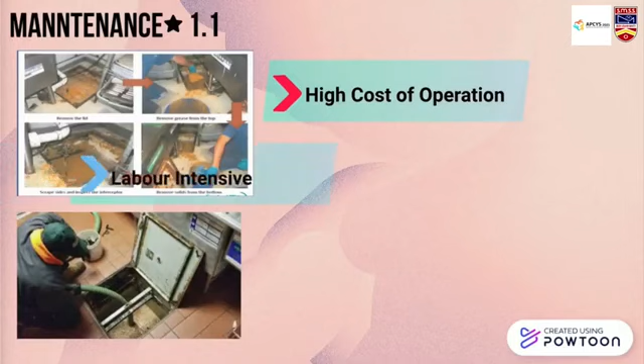The maintenance of a standard grease trap requires a high cost of operation, is labor intensive, and is harmful for the workers.

First, water from the kitchen grease trap will flow out through an inlet pipe. Second, grease that is less dense than water will float above the water, while food solid that is more dense than water will sink. Third, wastewater will flow out through the crossover pipe into the secondary tank. And lastly, the wastewater will flow out through the outlet pipe to the sewage pipe.

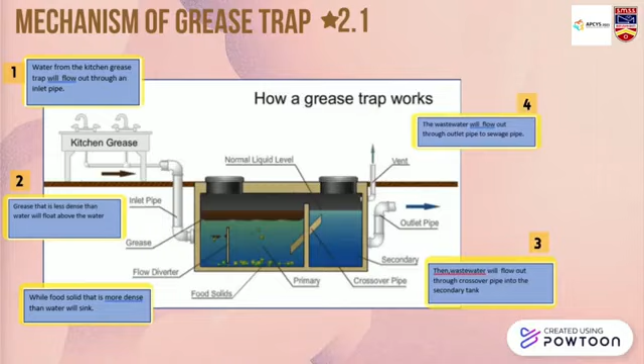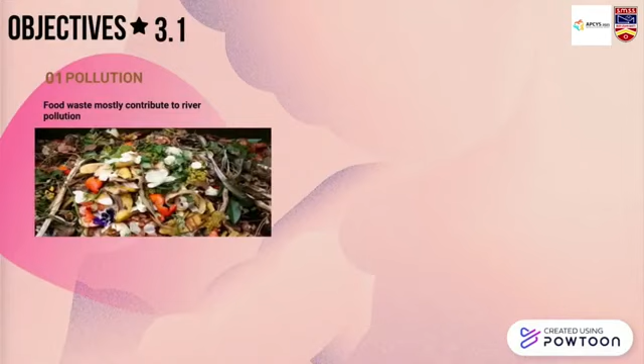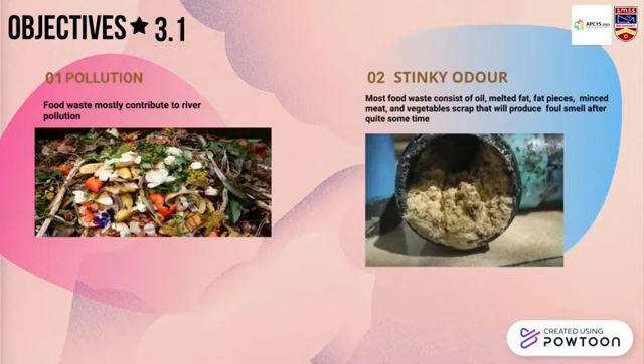Now we move to the problem statement. First, pollution: food waste mostly contributes to river pollution. Second, stinky odor: most food waste consists of oil, melted fat, fat pieces, minced meat, and vegetable scrap that will produce foul smell after quite some time. Third, high cost: the cost needed to repair and maintain the clogged pipes due to solidification.

Our goal is to design a smart maintenance system based on the Internet of Things (IoT) to do the maintenance service for the kitchen grease trap.

The novelty of our product is first, cost efficient; second, innovative design; and third, the application of Internet of Things.

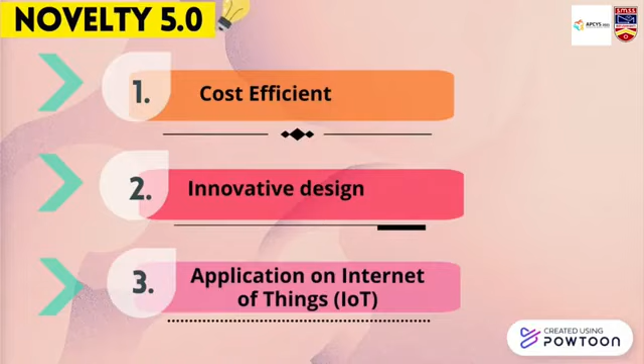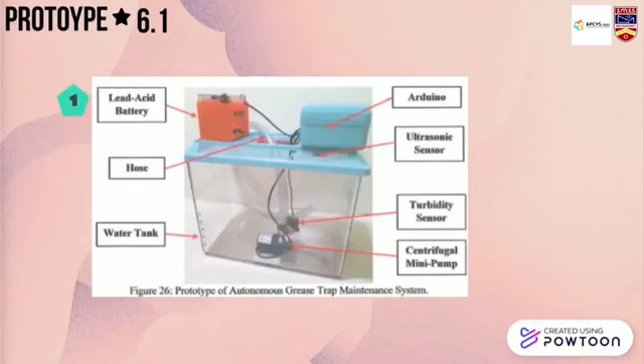For the prototype, there are 7 components that we use: lead acid battery, hose, water tank, Arduino, ultrasonic sensor, turbidity sensor, and centrifugal mini pump.

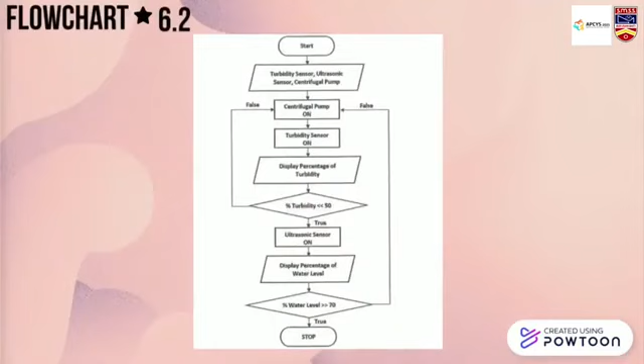From the chart below, we can see how our autonomous grease trap based on the Internet of Things works when it is operated using an Arduino.

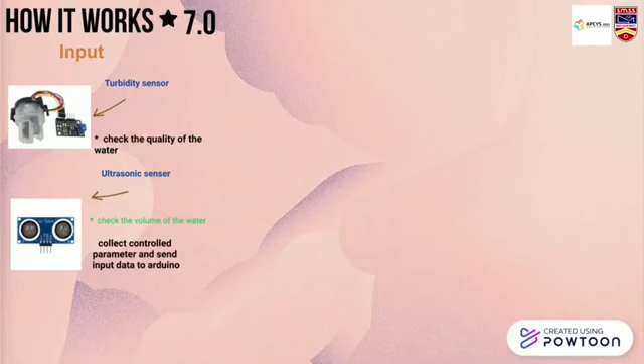How the system works: first, we have a turbidity sensor to check the quality of the water. Then we have an ultrasonic sensor to check the volume of the water and also collect control parameters and send input data to the Arduino. The Arduino then processes the input data according to the coding.

We also have a centrifugal pump to evacuate water whenever the data received matches the coding uploaded. We use a Blynk app to show data received from the sensors.

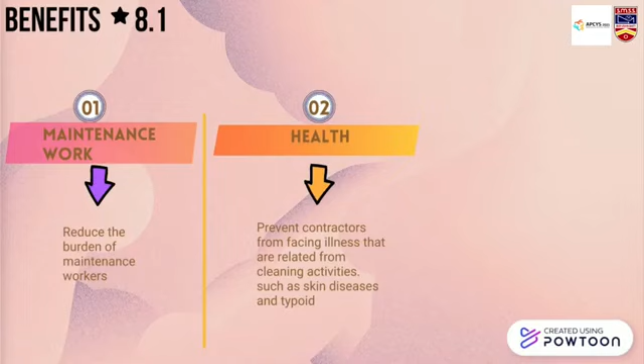For the benefits, it reduces the burden of maintenance workers. It prevents contractors from facing illnesses related to cleaning activities such as skin diseases and typhoid. It also restrains water pollution by minimizing any risk of failure or water discharge.

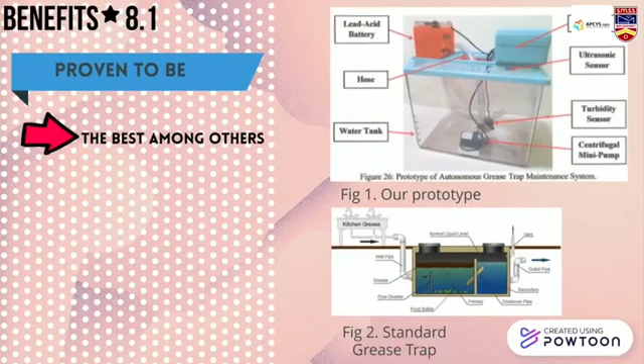Hence, it is proven that our grease trap is the best among the others. With gratitude, our product has a positive impact that can change our life to become harmless.

For the use of our grease trap, it is suitable for restaurants, hawkers, schools, and also hotels.

In conclusion, our grease trap can be implemented in any other country as it is parallel to the fourth industrial revolution, or 4.0 revolution, with the usage of Internet of Things (IoT) that has been embedded.

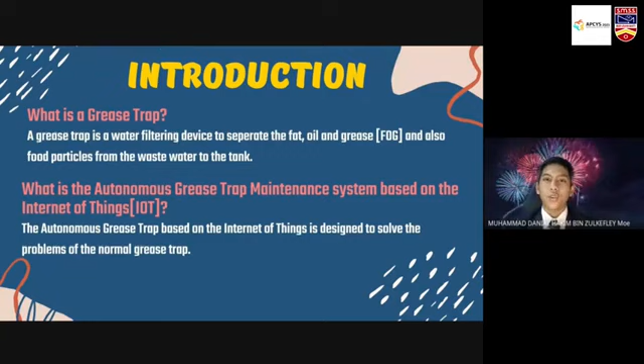A grease trap is a water filtering device to separate the fat, oil, and grease, also known as FOG, and also food particles, from the wastewater to the tank.

So what is the autonomous grease trap? The autonomous grease trap maintenance system based on the Internet of Things is designed to solve the problems faced with a normal grease trap.

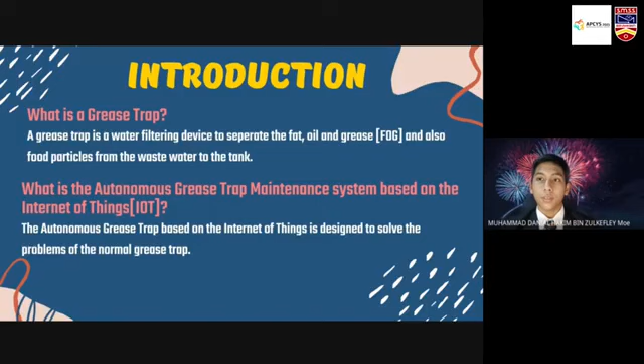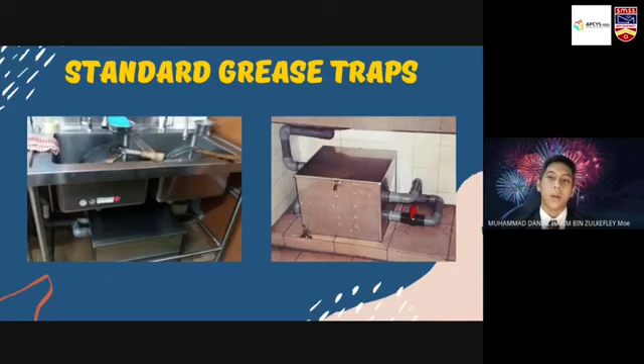In Malaysia, the municipal authorities enforce that all commercial restaurants are required to install a grease trap in the kitchen. There is also a quarter rule, or the 25% rule, where the water level inside the grease trap shall not exceed 25% of its capacity, or else the restaurant will be fined 1,000 ringgit, approximately 250 US dollars.

So now let's have a look into the manual way of cleaning a grease trap. First, the worker will remove the lid of the grease trap, and then begin removing the grease from the top, then go to the bottom, and lastly scrape the sides and inspect it.

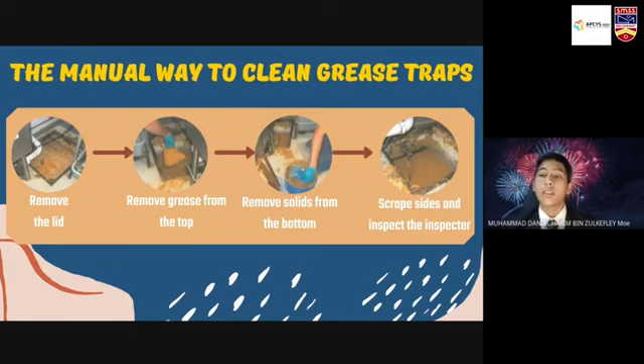We can see that this problem is not only tedious, it is also unhygienic and unhealthy for the worker in the long term. Not to mention that this is highly labor intensive, thus resulting in a high cost of maintenance.

So now let's have a look into the problem statement. We have three problem statements for today.

First is food waste. You know that food waste mostly contributes to river pollution, and if this thing is unchanged, it can cause major harm to the aquatic ecosystem.

Then for the stinky odor, we know that most food waste consists of oil, melted fat, fat pieces, minced meat, and vegetable scraps that will produce foul smell after quite some time. These can be dangerously harmful to the worker when they are doing maintenance work.

And lastly, the high cost. The cost needed to repair and maintain the clogged pipe due to solidification. This is very work intensive and can result in a very high cost if the problem is unsolved for a very long time.

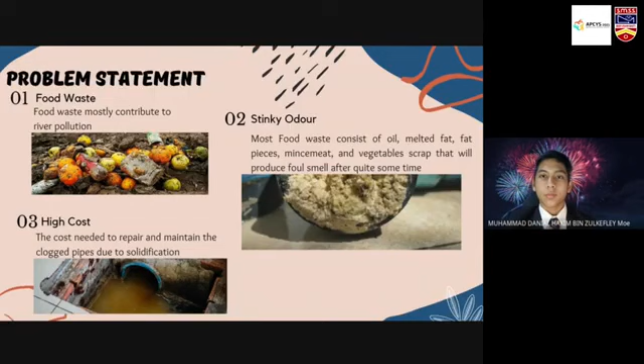Alright, so maybe a lot of you are wondering, how does a grease trap work? Now I will explain to you how it works. As you can see in the picture, there are 5 steps, a flowchart in how a grease trap works.

Firstly, the water from the grease trap will flow into an inlet pipe. Secondly, the grease that is less dense than water will float above the water. Thirdly, solid food that is more dense than the water will sink to the bottom. Then the waste water will flow out through the crossover pipe into the secondary tank. And lastly, the wastewater will flow out through the outlet pipe into the sewage pipes.

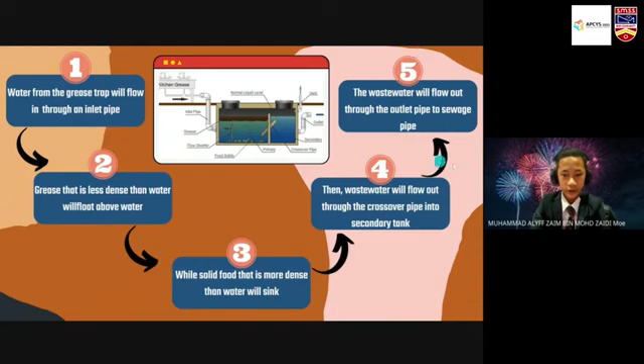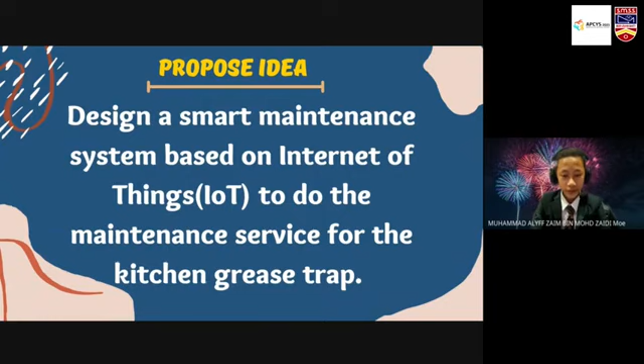Alright, next. Now for the proposed idea or the objective of the autonomous grease trap, the objective is to design a smart maintenance system based on the Internet of Things and to do the maintenance service for the normal and standard kitchen grease trap.

Alright, so now this is an example of the prototype that we have built. It contains 7 parts. The first is the lead acid battery and alkaline battery. Second, hose. Thirdly, a water tank. And then we have Arduino. And then we have an ultrasonic sensor. And then we have a turbidity sensor. And lastly, we have a centrifugal mini pump.

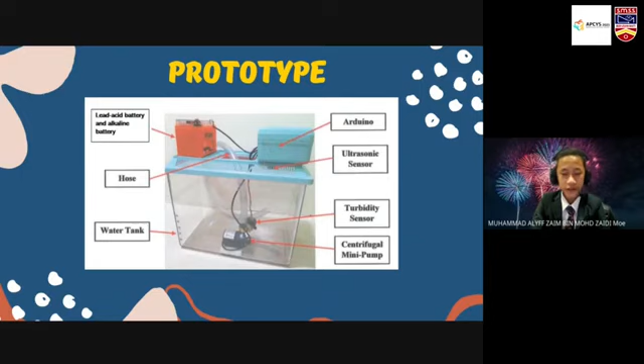Now let's move on to the next slide. So let's look at how our autonomous grease trap works.

Okay, now for the input, we have the turbidity sensor and the ultrasonic sensor, whose function is to check the quality of the water and to check the volume of the water level. Then we also have an Arduino to process and computerize the input data according to the coding that we have done. Then for the output, we have a centrifugal pump to actuate water whenever the data is received and is controlled when the coding is uploaded. Then we also have the Blynk application as the output to show data received from the sensors.

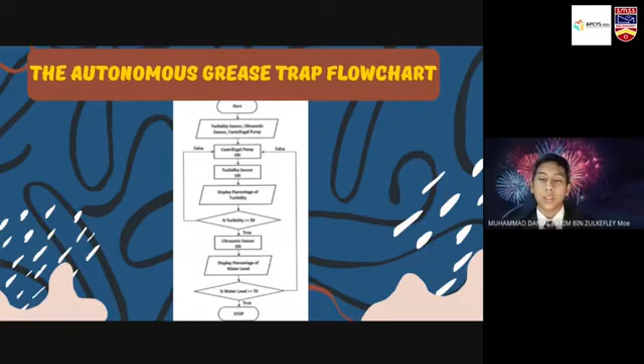Alright, moving on. Now we will move on to the feasibility or market potential of this project. So for the market potential or feasibility of this project, we target four primary targets, which are schools, restaurants, hotels, and property developers.

So for all these four main targets, we have found that most of them are more likely to place kitchens or maybe cafeterias. So in our opinion, this project is very suitable for these four main targets. Moving on to the next slide.

So for our project, there are three impacts. The first is maintenance work. As explained by Danial Hakim earlier, the contractors who are doing the cleaning part have a big burden, and through our project, it reduces the burden of maintenance work. For the second impact, the contractors who are cleaning these grease traps can also prevent themselves from facing any illness such as typhoid that are related to cleaning activities.

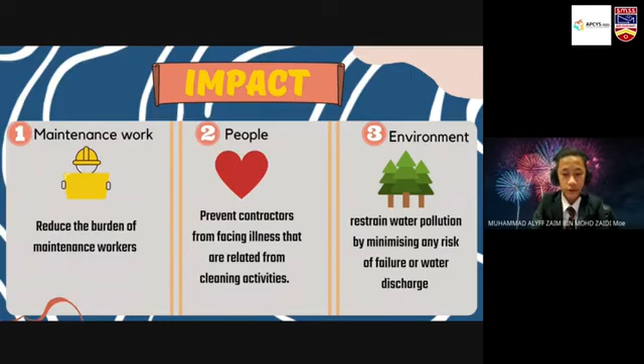And thirdly, for the environment. Our project can restrain water pollution by minimizing any risk of failure or water discharge.

So in conclusion, our autonomous grease trap based on the Internet of Things is suitable to be implemented in any other country as it is parallel to the fourth industrial revolution with the usage of Internet of Things that has been embedded. Alright, moving on.